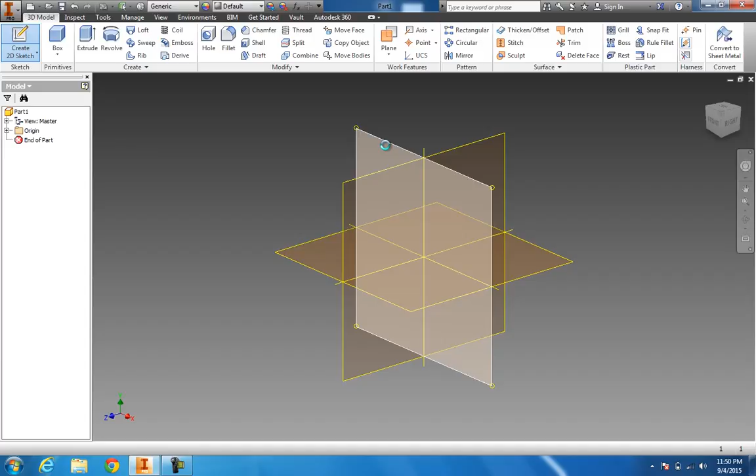Alright, we'll start drawing this switch base, and I'm going to start out and just create a 2D sketch.

As a whole, let me get some measurements here. We got a 2 and a 1, so it'll be 3. I'm just going to rough this in. I'll do the first little piece, this 3.5 by 1.75.

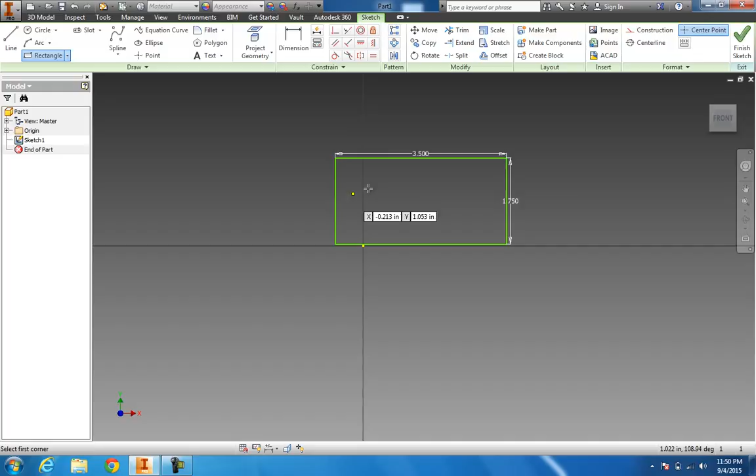So just put my 3.5 in, 1.75, enter. We'll go ahead and put that in there. And also it looks like at 2.75 we've got an angle coming down on that.

And that should be 2.75. I'm just going to go ahead and get rid of this dimension too, to keep it from constraining itself.

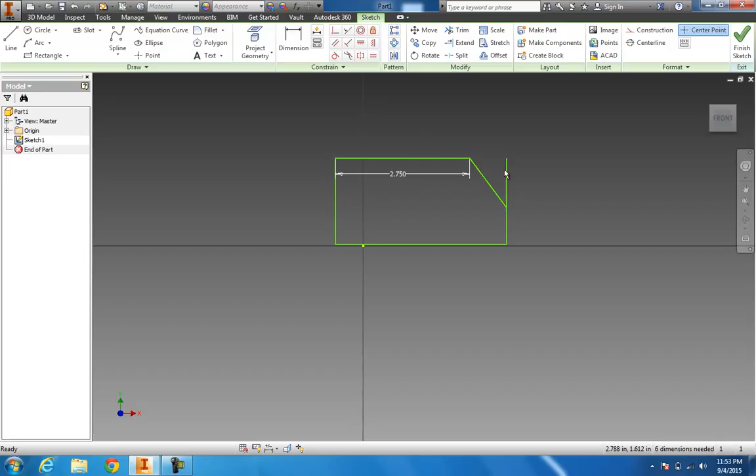Then we'll take and just trim. Uh-oh, gotta watch out about that. We'll delete that one too. And that constraining, these dimensions will constrain it, and then when you try to move something, it'll do some crazy distortions to it.

This thing looks like it's 2 and 1, so it's 3 inches back. So, finish sketch.

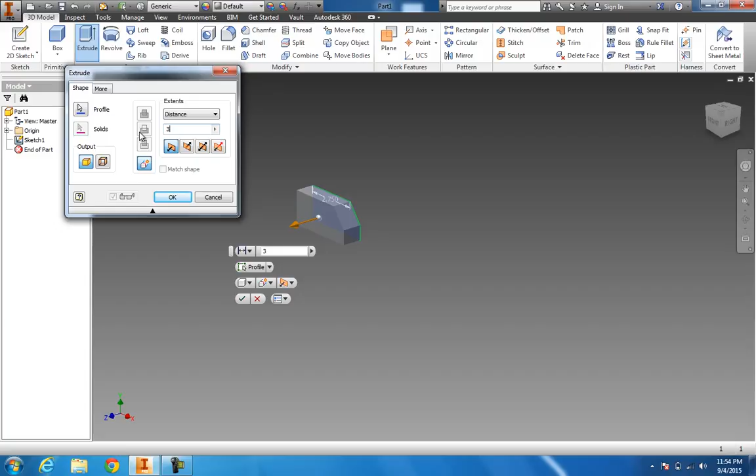This will be 3. This actually goes through the whole entire part, and it doesn't look like it's kind of strange. So I'm going here on the top, hit new sketch, and it looks like you got a 30-degree angle

coming off of it at 2.25. So, line, and you got like a 30-degree angle coming over like this.

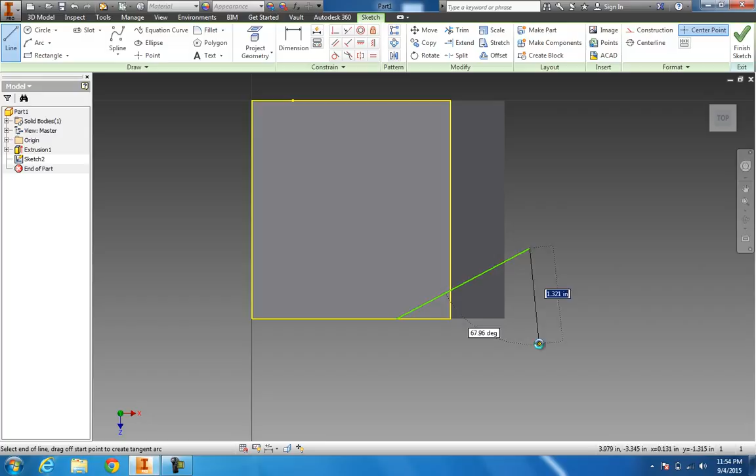Dimension. Get you that point to this point, should be, looks like 2.25. Enter. This angle here should be 30. Enter. And then just trim that.

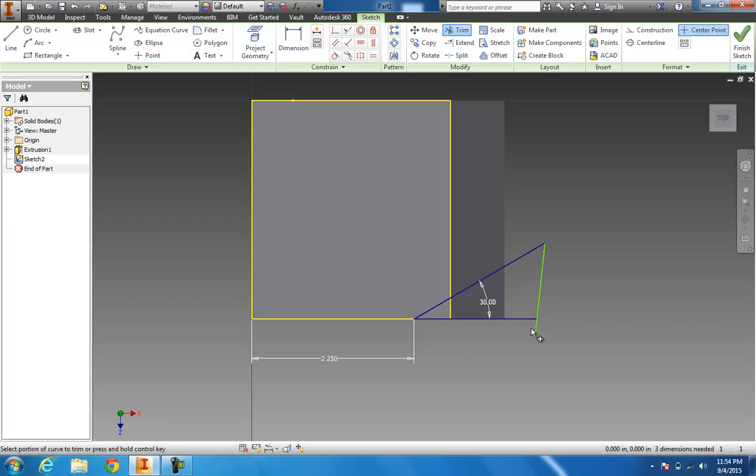Finish sketch. Extrude this. Cut all of it. And that's gone. Now, got all that little piece finished.

Now we gotta, looks like, put the rest of this image on there. And what I'm going to do is turn this to the back side. We're going to start this sketch on this back side of this, and it looks like

this starts, pretty much we're starting even with this right here. So we'll start right there.

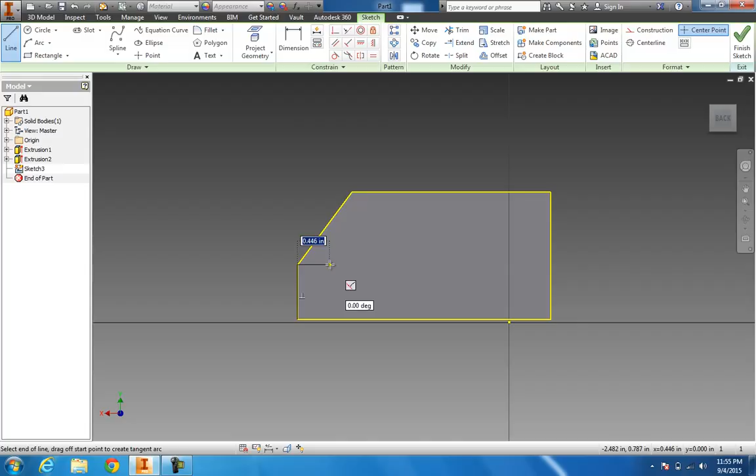It's 3.5 all the way across. Overall it's 7. Okay, so I'll click on that, and dimension.

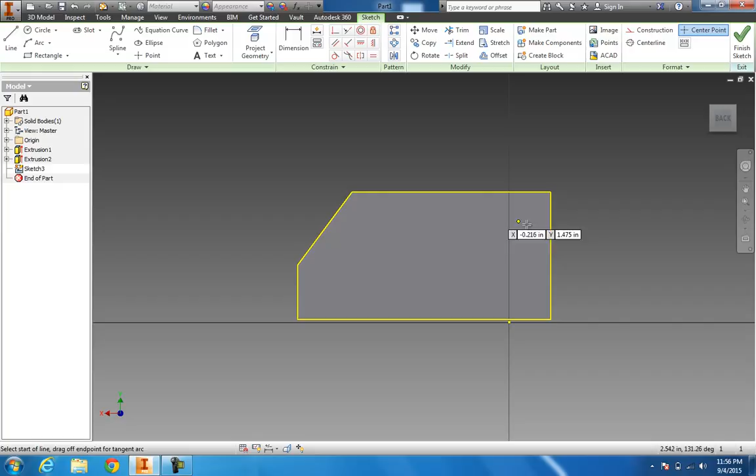It won't let me do that. I'm just going to take and track it over. Catch that, bring it all the way out to 7. Enter, just like that. We want to come up

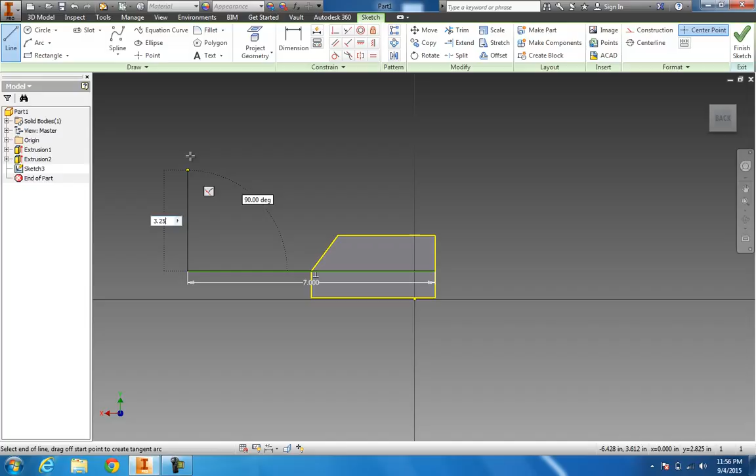3.25. I'm just going to rough this in. 3.25, enter, bring it back, and tie all this in just like that. So we've roughed in the whole sketch.

Now coming off the back side, it probably would be a little easier if we did it like this. And you can take like this extrusion that's in the front, you can suppress it, and what it'll do, it'll hide it, that way it doesn't bother you when you're drawing.

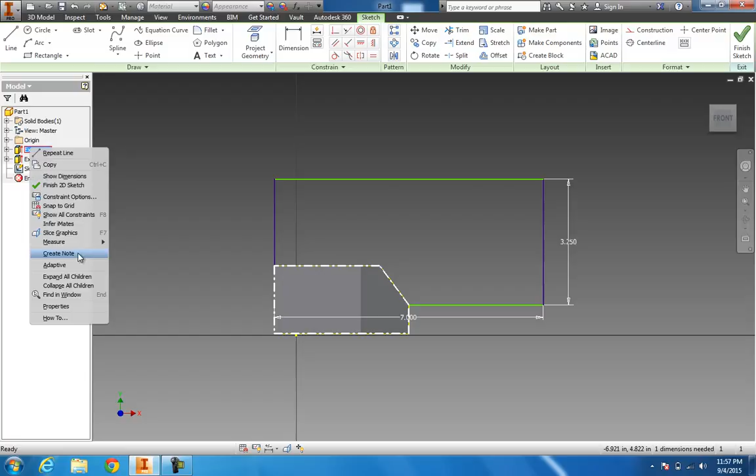Well, it's not gonna let me do it. Most of the time I can turn the visibilities off these, but it's not gonna let me do it. That's alright, we'll do it like this.

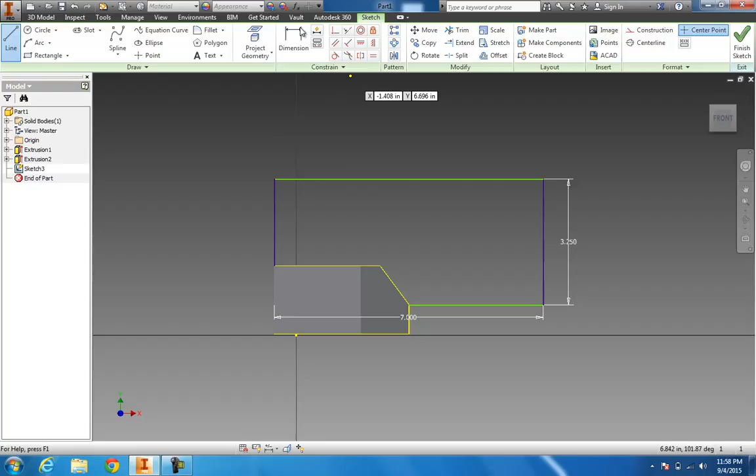So now we're going to come over 3, and we'll start that dip down into it. So what I want to do is I'll just go ahead and put my circle in. It looks like it's right. It's going to be centered up on this line, and it's going to be exactly 1 inch radius.

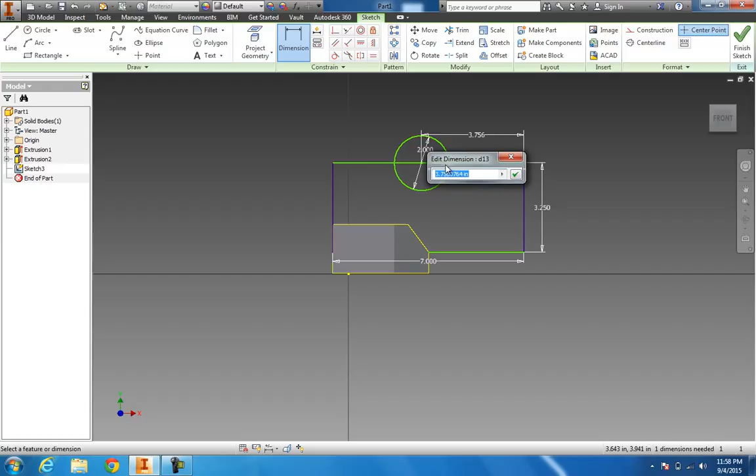This does it on diameter, so I'll put diameter in of 2, and now I want to just do some dimensions, and it should be 4. However, you got to account for that 1, so it'd make that 3. Just like that. And we've got all that finished up.

Looks good. Trim. Let's go ahead and trim some of this and clean it up. Just like that. Now, this thing also, I want to go ahead and put this

1.25, it comes down, and I want to hit an offset off of this. No, I don't need to do that. It'd be easier to just put a line down here and dimension it at 1.25.

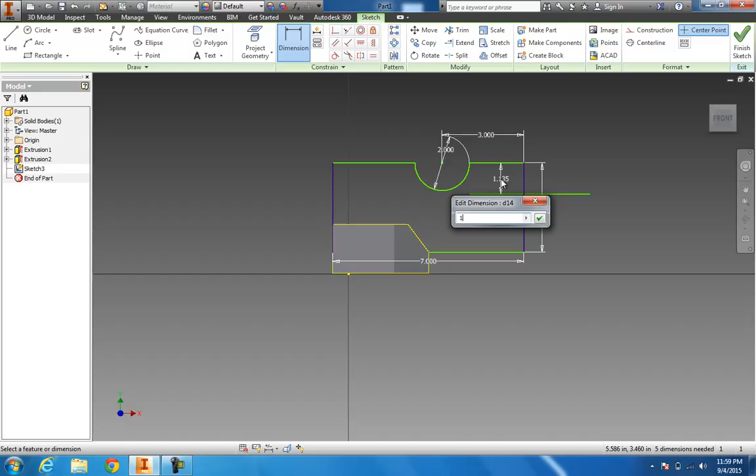Just like that. And we have got a 1/2 inch radius on that end. So basically, let's go up here and see if we can find a fillet at a 1/2 of an inch.

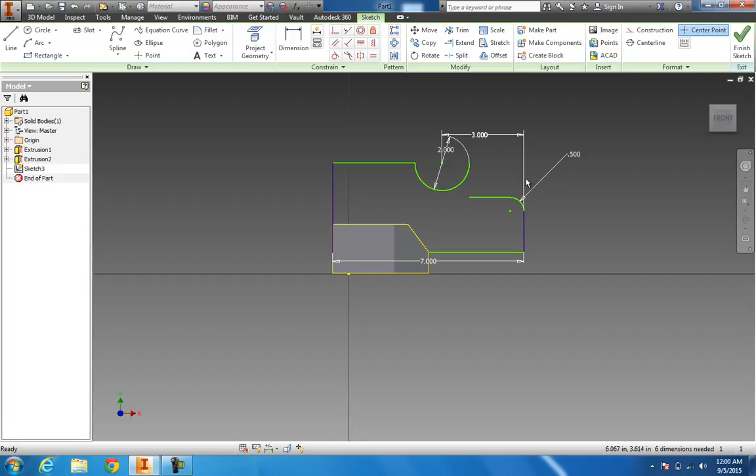Catch that to this, just like that. We got that in there. And now I want to get rid of this. Let's go ahead and get rid of that dimension. Get rid of this dimension.

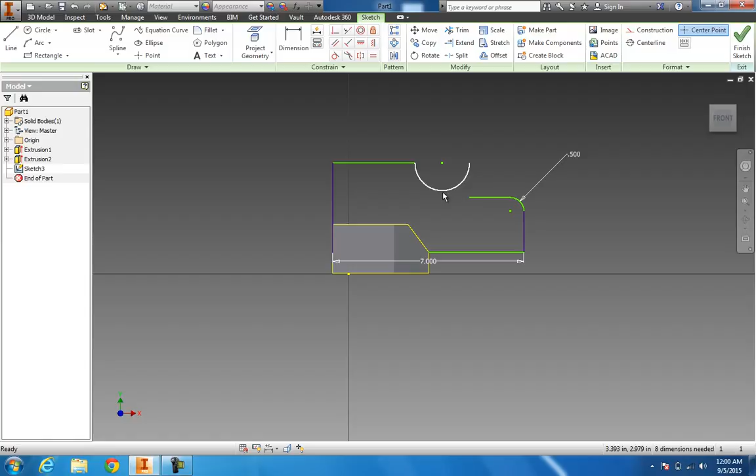Basically what you're trying to do now is you're trying to blend this in with a radius, is what it looks like here. And to do that, you've got a radius and you're going to blend these two radiuses. What I would do would be this. You could use an arc. You got a 3-point arc.

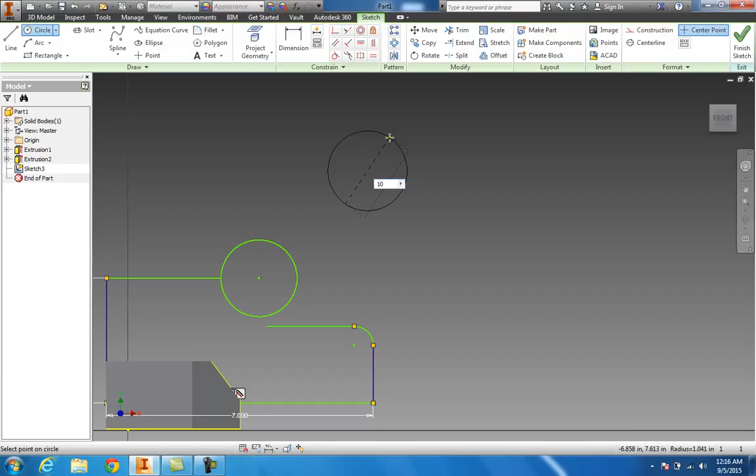But there's also this. Come up here, just grab a circle, and it looks like your radius was a radius of 5. So this thing does everything in diameter. So I'm going to type in 10, and I want to take that and just kind of pull that up and out of the way.

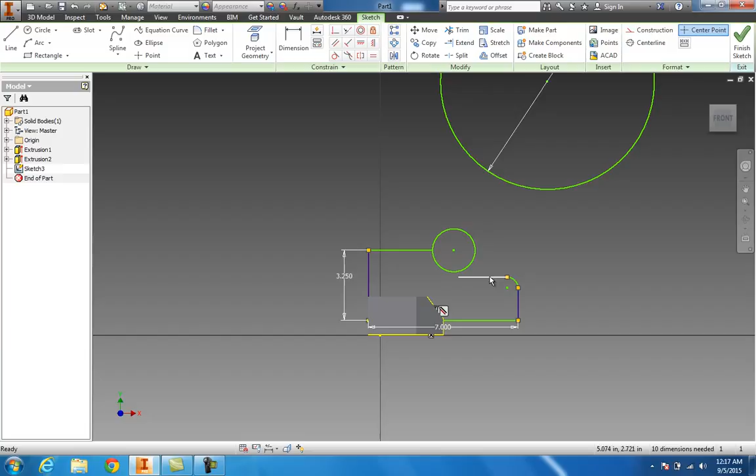Now, before we start doing anything, in this program, it's better if you get everything constrained. Now, you've got these constraints up here that you can use, and we'll show you a lot more of that in some later videos and assignments. But a good way to constrain is with your dimensions. So at this point, before you do anything like trying to get this constrained, this radius constrained into this radius and down into this, go ahead and put your dimensions on everything that you know.

You know this from here to there should have been 3. Lock it in. We know from here to here should be 3, lock it in. We know from here to there should be 2, lock it in. Lock this in, 1/2 of an inch, lock it in vertically.

It's not going to let me do it. That's all. The reason it didn't let me is because this is constrained to this and to this 2, and it didn't have to have another one, it's just over constraining it.

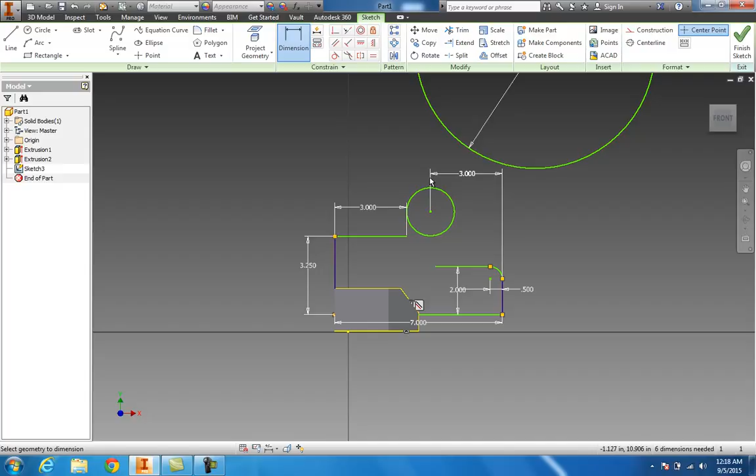Also dimension this right here in. Dimension, click on this and then hit this. And what I want to do is I want to pull this up just a little bit, just like that, so I can dimension it. I want to click on this, and I want to make it 0.

Just like that. And now everything's constrained. It shouldn't move. It should not move. So all I want to do now is come up here and use my constraints. Hit constrain.

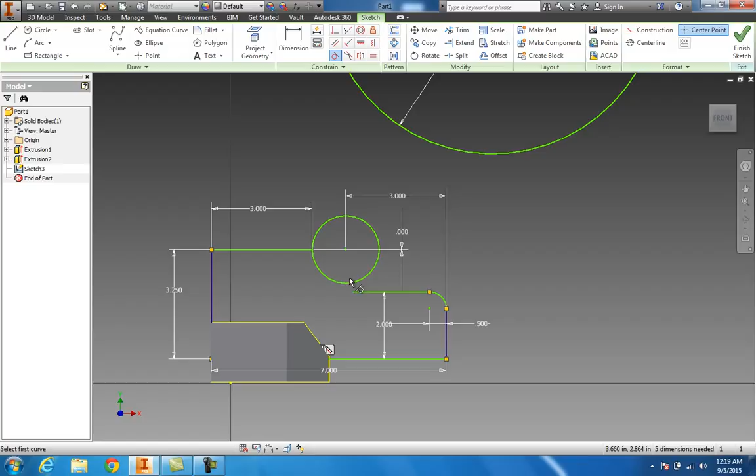Click on this, and I want this thing to constrain, and this is a tangent constraint. That means I want to make this arc smoothly blend in with this one. So all I want to do is click on this and click this. Let's bring it down here just a little bit. Bring it like that and kind of let it. He didn't know what I was wanting to do, so it's probably better if I do it like this and then like that. Smooths right in. You see that?

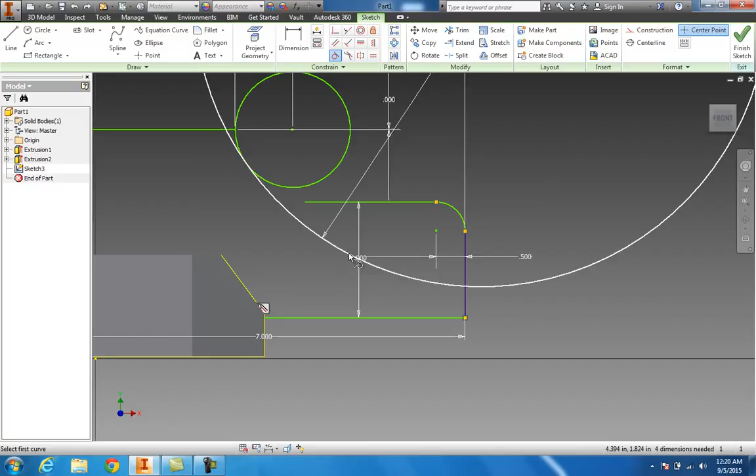Now I'm going to hit constrain again, and I want to constrain this with this, and it didn't work. Back up. Constrain. What I need to do real quick is move this kind of upward. Aha, I see what's going on.

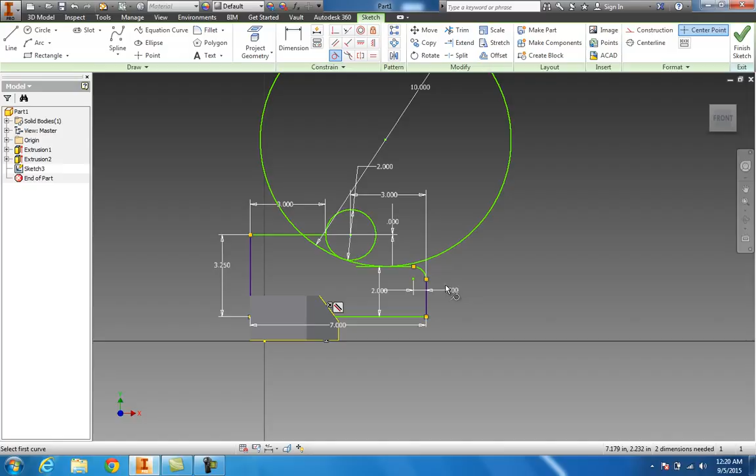We need to make sure that we constrain our arc too. It should have been 2. Now that should be locked, and now I should be able to move this object. Here, constraint, this to this, just like that. And you're seeing now that radius, or was it 5? That 5-inch radius is now constrained to this arc, and it's blended right in with this.

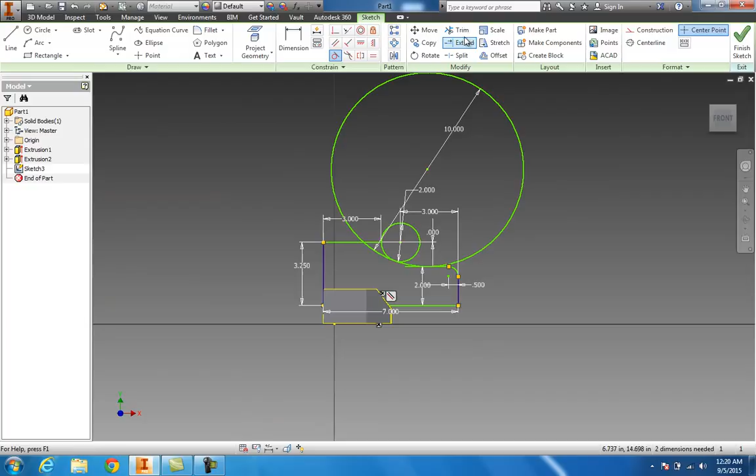So what you have to do is come up here and trim. It's not going to let me trim all that. Trim, trim, all that's clean. Trying to figure out why it's not letting me trim this. I'm going to clean some of this stuff up real quick.

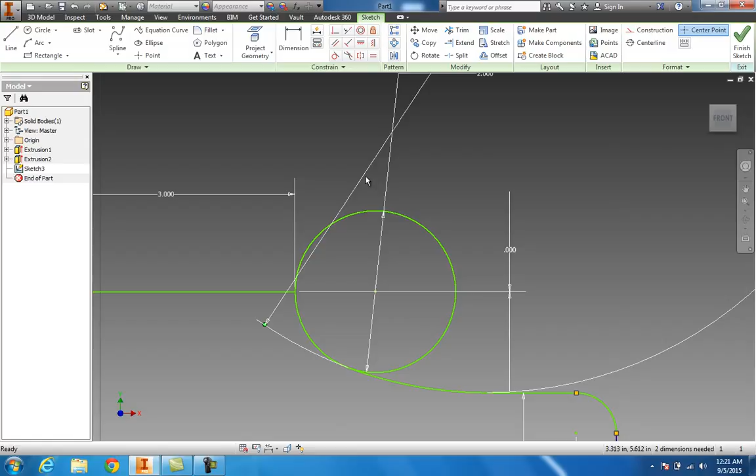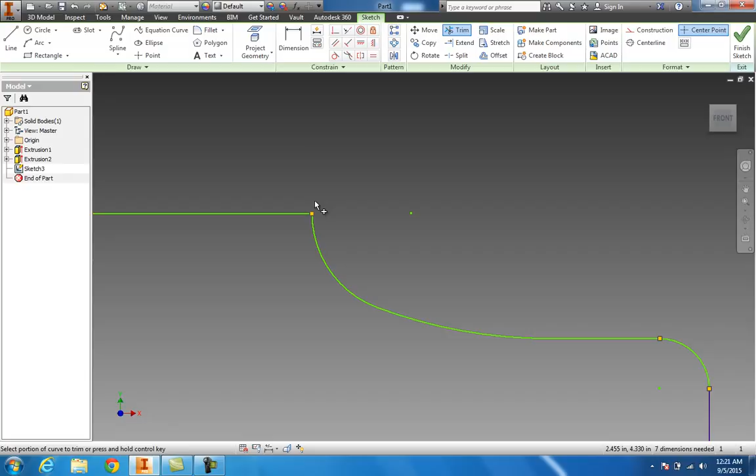You don't have to delete all those off. I was just deleting it so I could see this a little better and see why it's not wanting to trim. There, it did. Okay.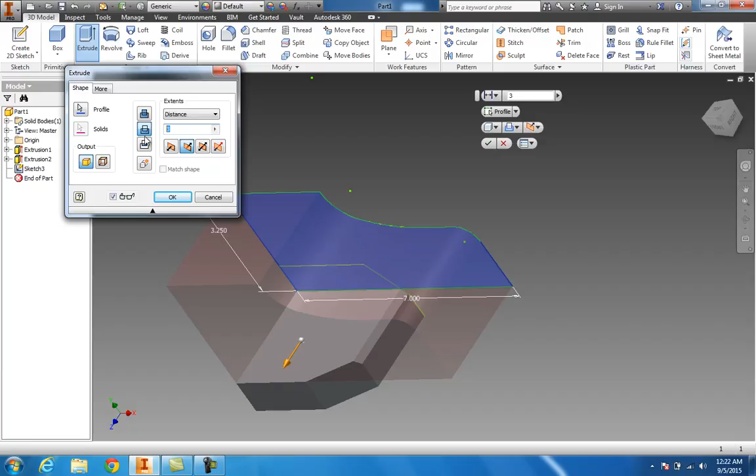And right there is that arc, and you just go up here to finish sketch. And again, you just hit your extrude. Now there's another method that you can use. Go back the other way, and I think, what is it, just about an inch wide? Yeah. Oh, go back and double click that. I didn't mean to cut it, I meant to join it.

And right there's what that part looks like. And I don't think we got it right, because I do believe that this thing should have come down even with that.

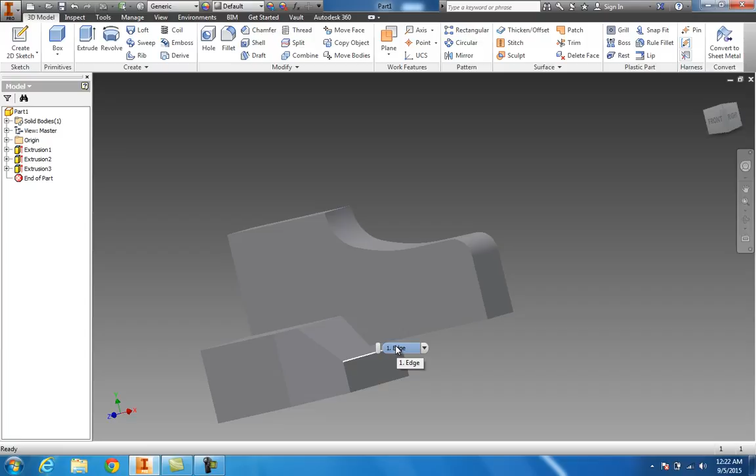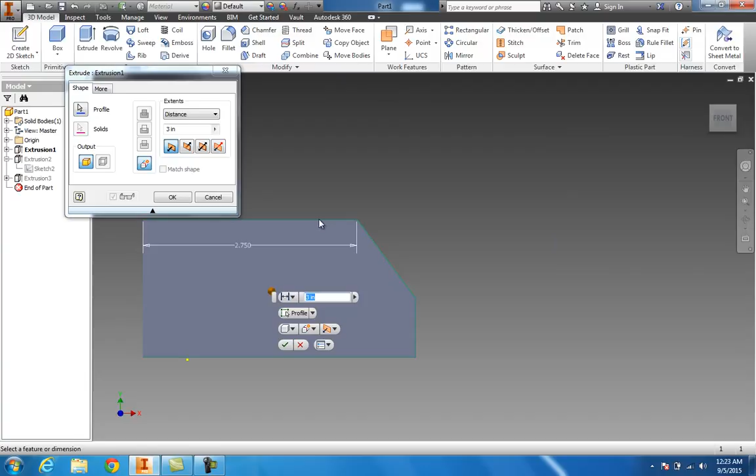I think I see what's going on. I have to go back to this original sketch. Edit that sketch. Nope, not that one. Finish that one. Edit the first sketch. I need to edit the sketch and not the extrusion. I think this dimension here should have been 1 inch, which it is.

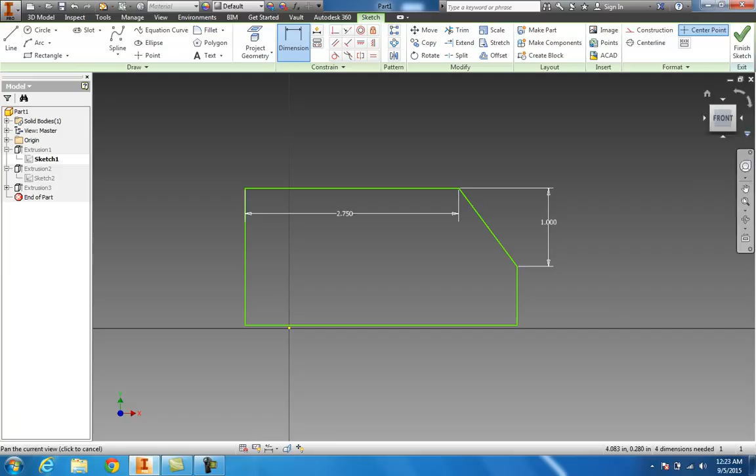Let's just take a look and see what kind of... I'm just going to really quick throw up a fake new sketch just to see the dimension on this. That's what it is. It needs to come up. This one needs to be moved. It's no big deal, we can do that. Let's go into it.

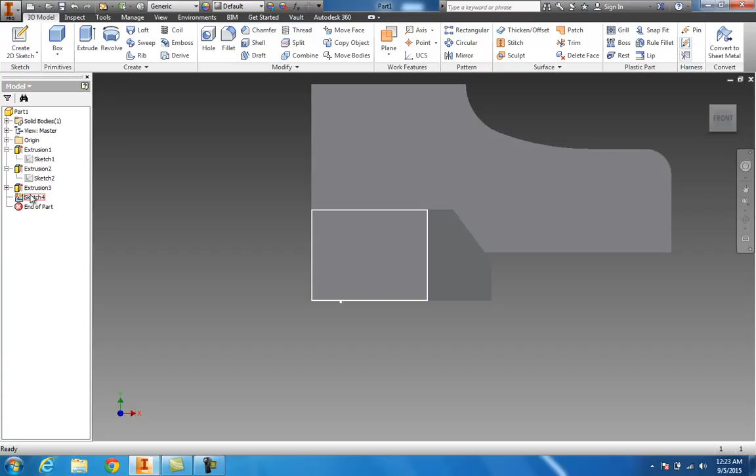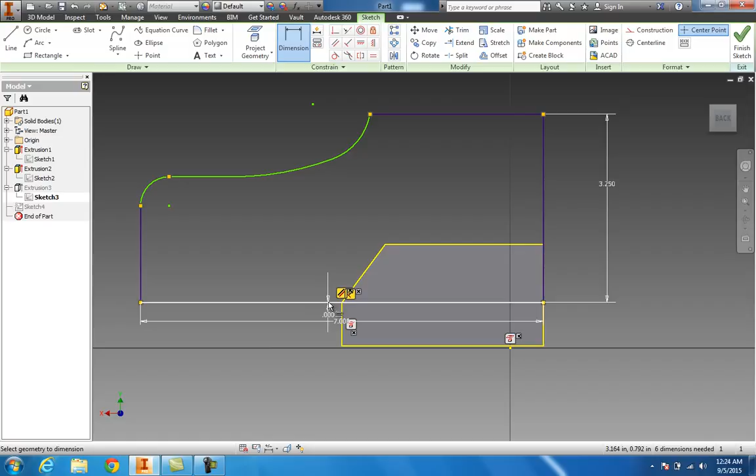Back to this sketch. Edit sketch. Oh, that's a fake one that we made, I should delete that one off. Here's the one that I need to work on. Basically I just need to bring the whole sketch down just a fuzz. From that point to this point should be 0. And that's what that part should look like. So it's just a strange part, and that's what it's like right there.

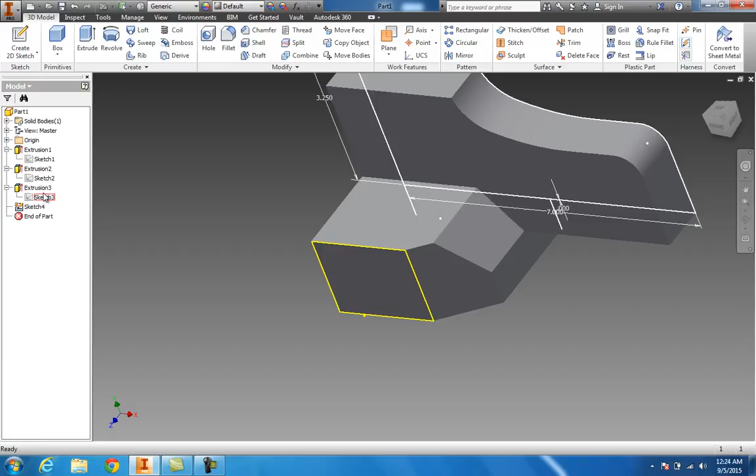Now, also I said there's another way. There is another way that you could do that besides using those constraints, and I'll show you how to do that real quick. It won't take just a second. I'm going to go back and open this one up, and we'll turn it around to the way that it shows in the book.

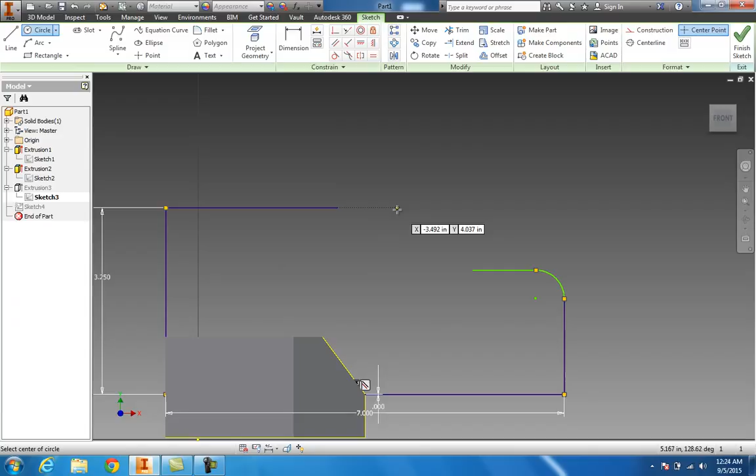I want to delete this out. I want to delete this and delete this. I'll leave that line in there. Let me put that arc back in here, it'll take just a second. That needs to be 2 because it ends up being a 1 inch radius. I got to dimension it.

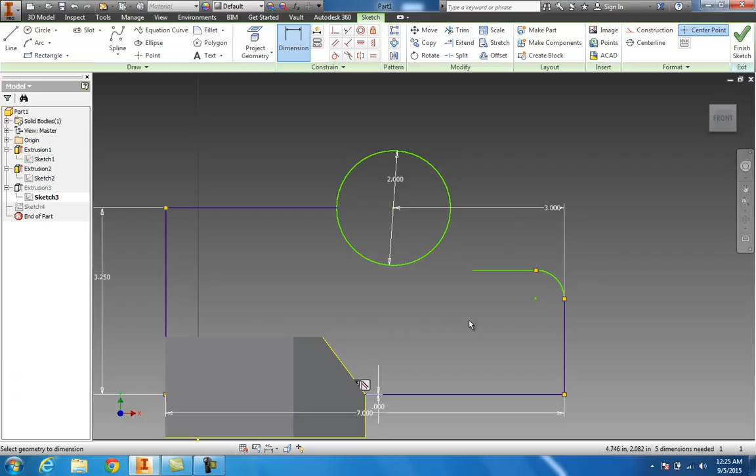And this is the other method you can use when you're doing this. Hit this, and I think it was 3 to here. Now, this is the other method. It is more of an old drafting technique, and I'll show it to you. What you have to do for this technique, some people think it's a little easier. I like the constraints, once you get used to them they're a lot faster, but this is the old technique.

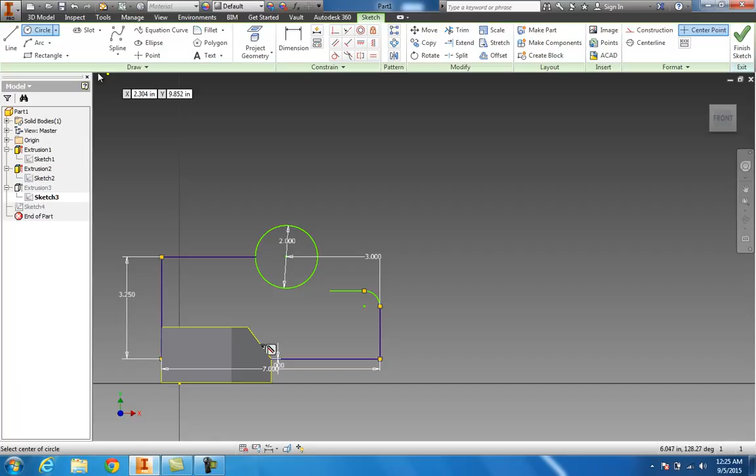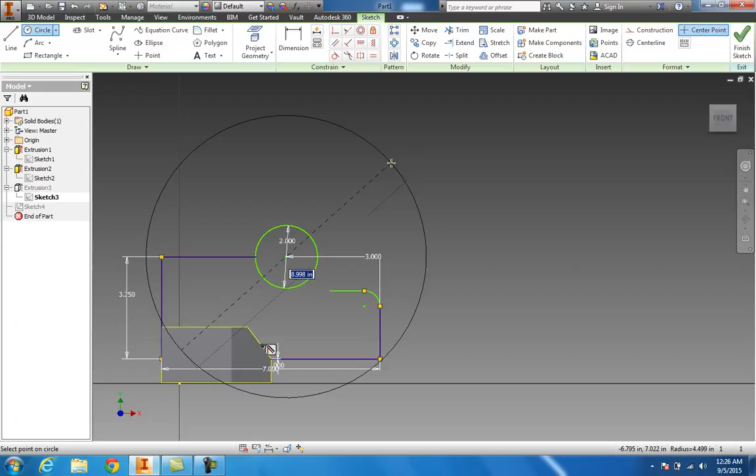Just hit your circle, go from the center of it, and you're wanting to hit the bottom side of this. So you would have to subtract this radius away from your big radius, which is 10, so you would need to make a 9 inch radius here. I'm sorry, let's see, we have a 5 inch radius. We need a 5 inch radius, and we have a 1 inch radius there, so we need a 4 inch radius, so it would make this 8.

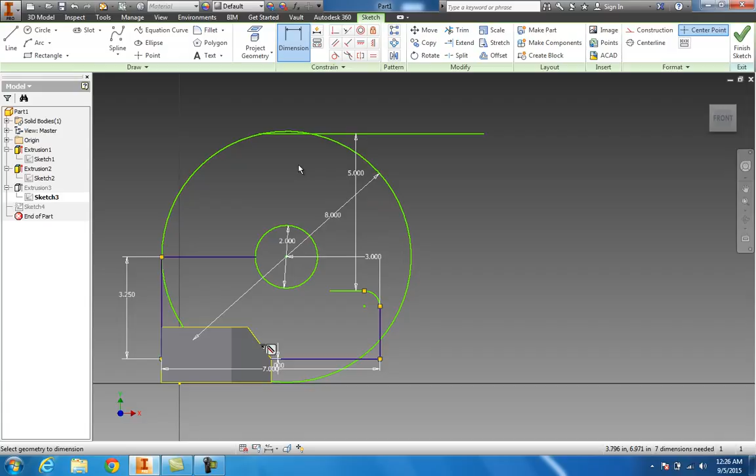Okay, now the next step would be to... you see this line right here? You offset that line exactly 5 inches, because that is what radius you need. Now, where this line crosses this line for the first time -- because it crosses it twice -- the first place it hits will be your center point.

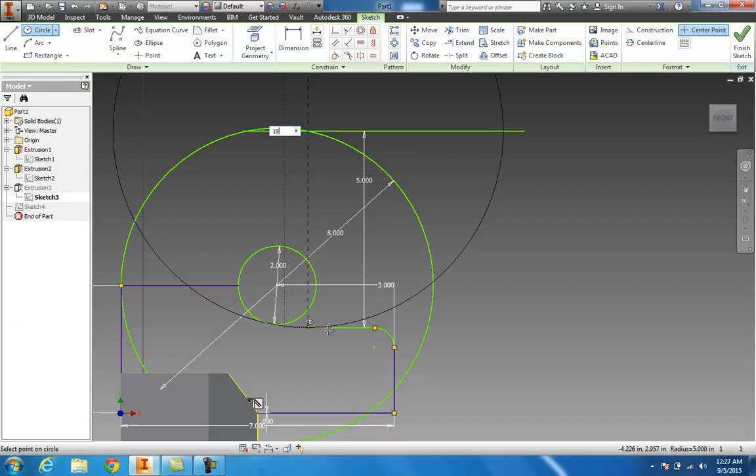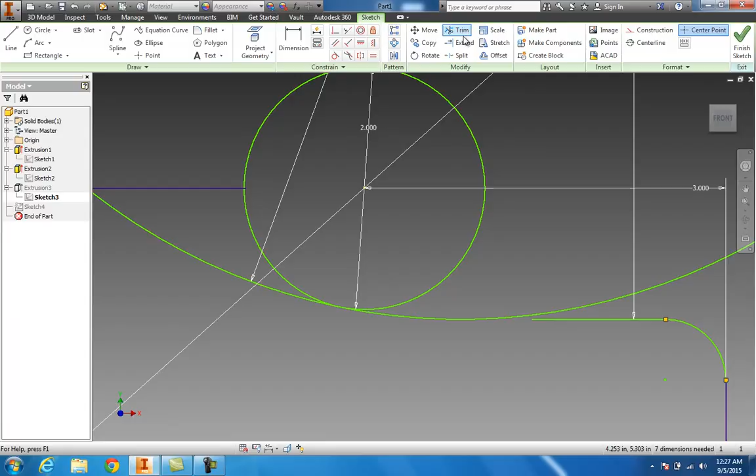So if I come in there and put this in, this radius, and type it in -- it was a 5 radius, so it's actually a 10 inch diameter. Huh, the wrong number. Click right there, it should be 10, enter. And you can see how it just smoothly hits this, and then if we extend this one on over, it'll hit this one just like that, and then you just trim everything up.

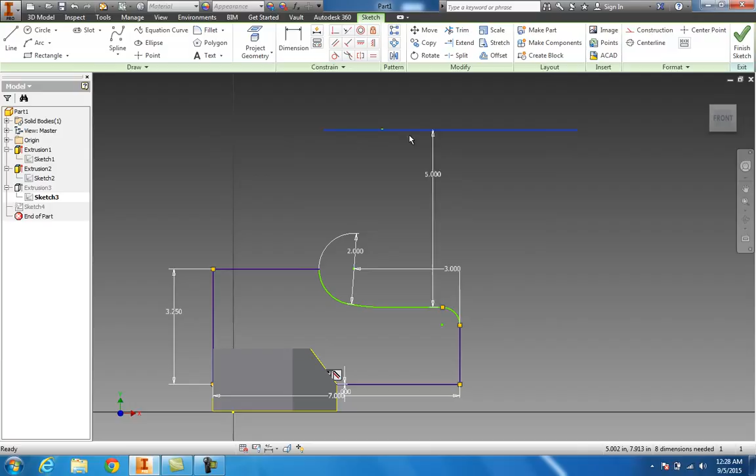That's an old drafting trick. The rest of it we just delete out, and you come up with the same results. I mean, it's identical, nothing different -- same result. So you could do it either way, it doesn't matter to me. Just if you need any more help, let me know.